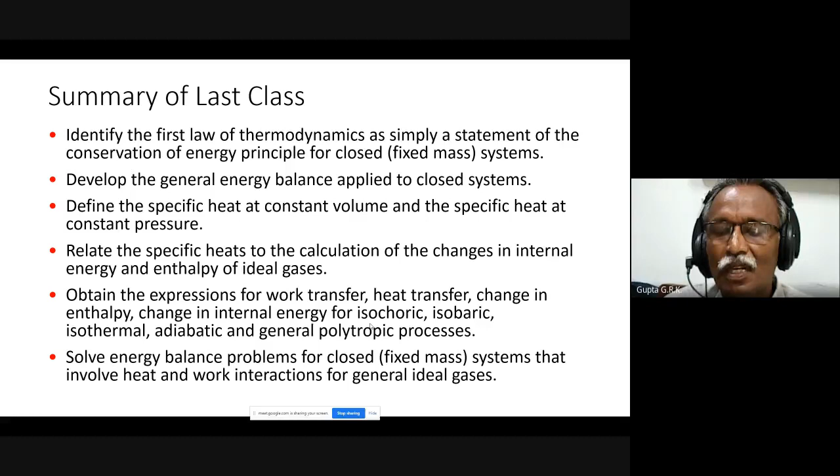And we solved energy balance problems for closed systems that involve heat and work interactions for general ideal gases. And if you see the formulae that we had, we have a summary of the formulae for all the closed systems for different processes. Mainly 1 or 2 things I want to stress on.

You remember that and it will make your life easier. So your first law of thermodynamics for a closed system is delta Q equals dU plus delta W. That simple thing if you take, if delta W is not there, then delta Q is equal to dU.

So whatever the sign of delta Q, dU also will have the same sign. If delta Q is positive, dU is positive. If delta Q is negative, dU is negative. Delta Q positive means I am giving heat to the system, so naturally internal energy increases, so dU is positive. So heat given to the system increases the internal energy of the system.

Similarly, delta Q negative means heat taken from the system, so naturally it loses internal energy and dU is negative and U decreases. So heat given to the system, internal energy increases. Heat taken from the system, internal energy decreases.

So it's straightforward. Suppose delta Q is not there, dU and delta W are there. So dU plus delta W equals 0, or delta W is equal to minus dU. So delta W and dU will have opposite signs. If work is positive, dU is negative. If work is negative, dU is positive.

We can understand that because work is positive means work is done by the system. How can it do that? By spending internal energy. So internal energy decreases. So if work is done by the system, internal energy decreases. If work is done on the system, delta W is negative, so dU becomes positive, meaning its internal energy increases, because I am doing work on the system, there is some input to it, so naturally its energy increases.

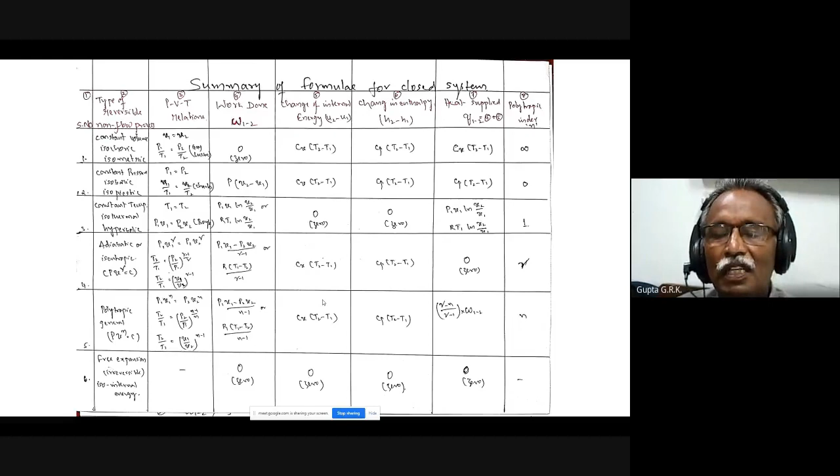Okay, some more things we will come across later. And also we have seen some more relations regarding efficiency.

Efficiency is desired output by required input. So output is the profit that I get, and input is my capital I spent for that.

And we defined combustion efficiency. So calorific value is the input, and whatever heat it delivers, that is the output.

And if you have a power plant with fuel as the input, and if I want the overall efficiency, the main input is the fuel, mass flow of fuel into calorific value, and the main output is electrical power.

But there are three energy conversions: chemical energy to thermal energy to mechanical energy to electric energy, through three different equipment. So I have to use the efficiency of all of them, and the product will give me the overall efficiency.

Similarly, for a pump, as I told, due to irreversibilities there will be losses. I am giving some work to the pump, and it increases the energy of the fluid. So input is the shaft work, output is the fluid energy.

Similarly, for a turbine, I get high energy fluid from which I get shaft power. So input is the energy of the fluid and output is the shaft power. So for pump-motor or turbine-generator, you have the combined efficiency: pump efficiency into motor efficiency, turbine efficiency into generator efficiency.

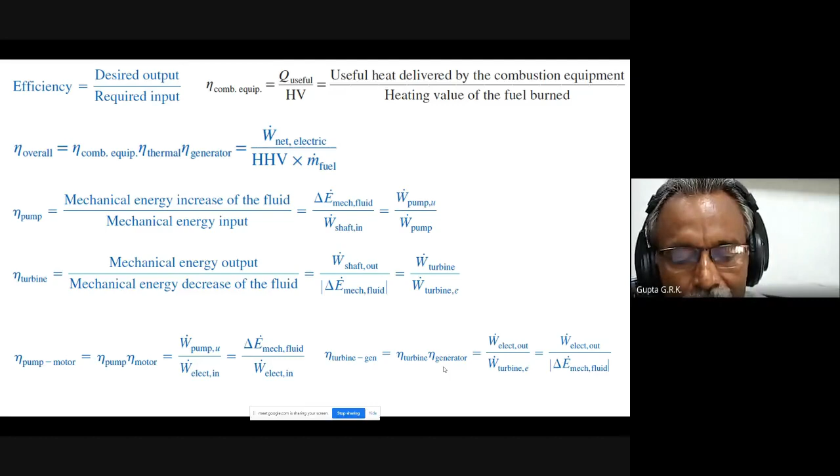Any doubts about this matter? Then otherwise we will go to today's topic. Mainly you have to feel comfortable in solving the problems. Once you are comfortable, you will have full confidence of handling the subject easily.

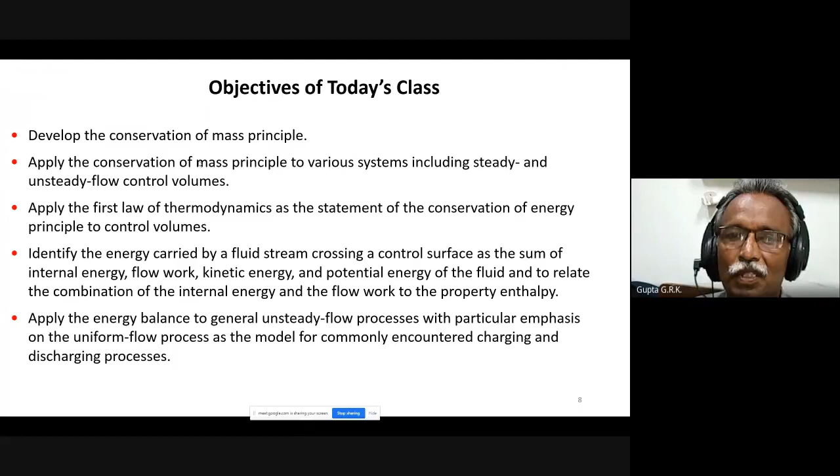And then we apply this energy balance or energy equation to various open systems or flow devices. So that is the objective of this particular class.

So here, first law application for open systems, control volumes, or flow processes are all the same. If I consider some arbitrary control volume, the boundary is called the control surface. This is the mass of the control volume, and there may be a number of inlets and a number of exits. So some masses are entering, some masses are leaving.

Okay, and so mass flow rate. What is the expression for mass flow rate?

Mass flow rate is equal to... another thing is, hereafter we use C for velocity. Why? Because normally V is for velocity, but V is volume in thermodynamics, so I will have confusion. In closed systems I don't have any problem, but when I come to open systems, I have both velocity and volume in the picture. So velocity is given the symbol C. So rho AC: rho is density in kgs per meter cube, A is area of cross section in meter square, normal to the velocity direction, and C is the velocity in meters per second.

So AC, this is meter square into meters per second, which is meter cube per second. AC is the rate of volume flow. This also I didn't write, but you have to know about this. In fluid mechanics you will come across this, right? They will write AV or AC. AV they will write, but here it's AC. So meter cube per second means so much volume entering per second. So this is volumetric flow. Into rho, kgs per meter cube into meter cube per second, will become kgs per second.

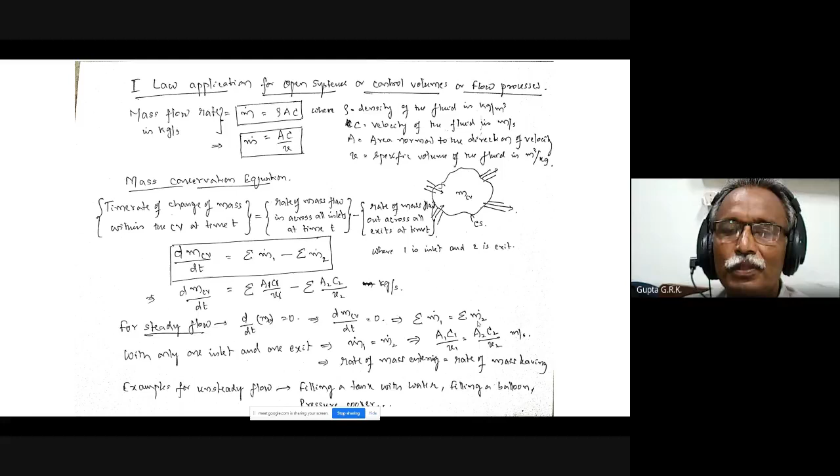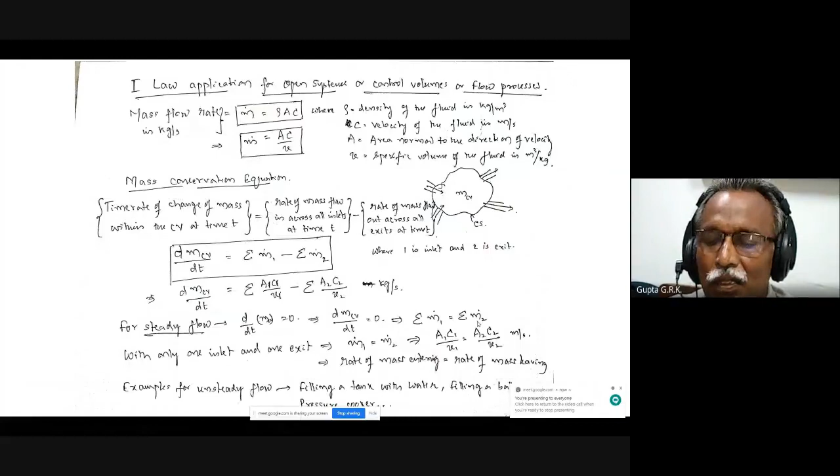So this is just straightforward, there is nothing much. Then, even in chemical reactions, mass is conserved. If I have 2 kg of hydrogen and 16 kg of oxygen combined, I will get water, which is the total mass, 18 kg of H2O.

Right? So conservation of mass principle for a 2 inlet and 1 outlet steady flow system. If 2 kgs are entering and 3 kgs are entering, leaving, so total inlet equals total exit, 5 kgs per second.

And conservation of mass principle for an ordinary bathtub. There is mass coming in, 50 kgs, and mass going out, 30 kgs. So there is an accumulation of water: delta m bathtub is equal to m in minus m out, that is 20 kgs. So this is conservation of mass, but this is unsteady flow. Here this is unsteady flow, there will be continuous increase of mass within the system.

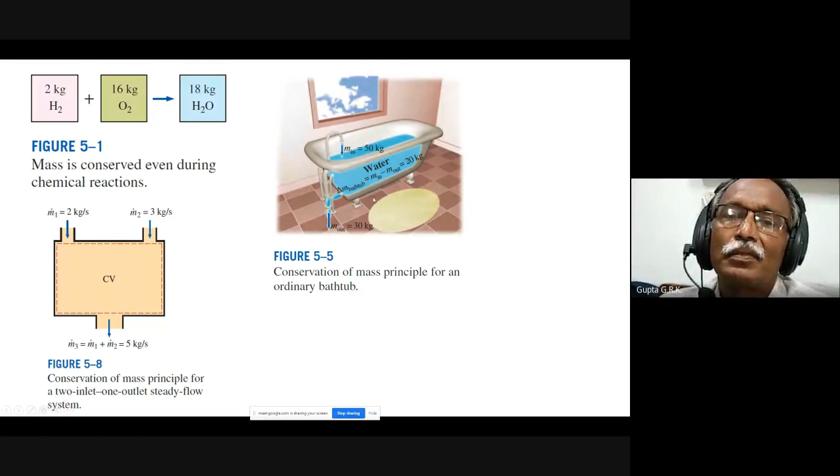And then another important thing is flow work and the energy of a flowing fluid. What is this flow work? Whenever some mass has to enter the system, it does not just open the door and come in. Suppose I open my door, and if my inside room is high pressure, how can something enter into it? If something is to enter, somebody has to push the air into the room, then only it can enter. So that is what is called flow work.

The work or energy required to push the mass into or out of the control volume. This work is necessary for maintaining a continuous flow through a control volume. If something is to enter, it is to be pushed in, and something is to go out, that is to be pushed out. So the work required for pushing the mass in or out is the flow work.

If the pressure is P and the area of cross section of the inlet is A, so PA is the force required to push it. Suppose this length it is moved by is L, so work equals force into L, and force equals pressure into area, so P into AL, that is equal to P into V, where V is the volume of flow entering the system. So the flow work is PV. This is important: flow work is PV. This is capital W, P into capital V, total volume. So per unit mass, flow work per unit mass, small w flow, is equal to P into small v, kilojoule per kg. This is the flow work.

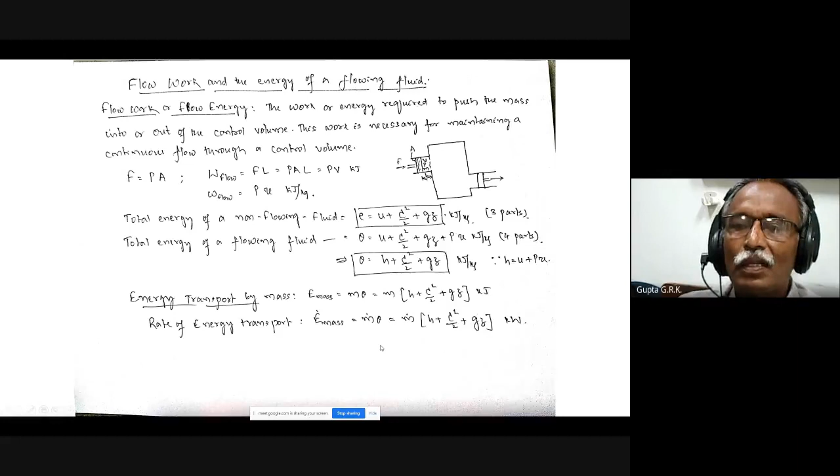Okay, that is the same figure. So the energy of non-flowing fluid is U, V square by 2, GZ. Energy of flowing fluid is this flow energy PV, U, V square by 2, GZ.

And these two together will become enthalpy. So it is before entering and after entering. So this mass goes into the control volume.

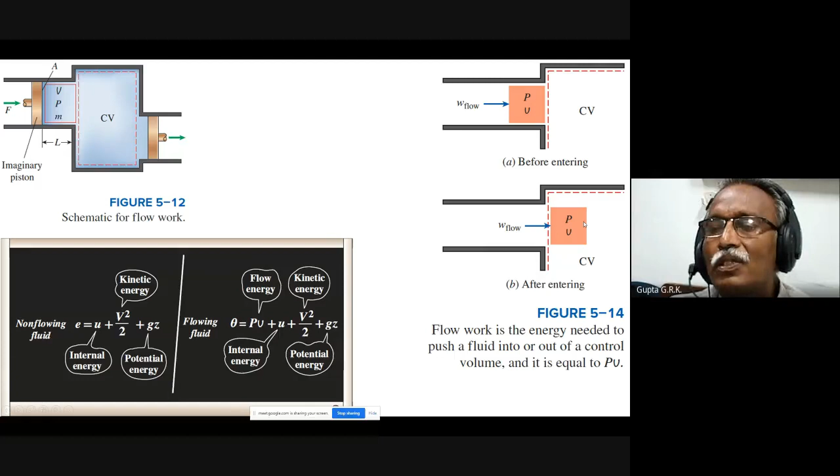Now we take the energy conservation. So rate of change of energy of the control volume. If the energy of the control volume is ECV, total energy of the control volume, then rate of change of control volume is dECV by dt.

So why does this energy change? Because of mass flow, because of heat transfer, and because of work transfer. Whichever crosses the boundary changes the property of the system naturally, that is the internal energy of the system or total energy of the system.

So dECV by dt is equal to rate of energy transfer in by heat, work, and mass, and rate of energy transfer out by heat, work, and mass. So the rate of heat transfer is equal to, suppose, delta QCV by dt. Here dot is not there, it is delta QCV by dt.

Because if heat is entering the system, the energy increases, so these two must have the same sign. If work is done by the system, then actually it decreases, total energy decreases, so I give minus here.

And some mass is entering with some energy, theta 1. So this energy entering the control volume is sigma m1 dot theta1 if there are more number of inlets. Similarly, sigma m2 dot theta2 if there are more number of outlets. Okay, this is the generalized energy equation for a flow system.

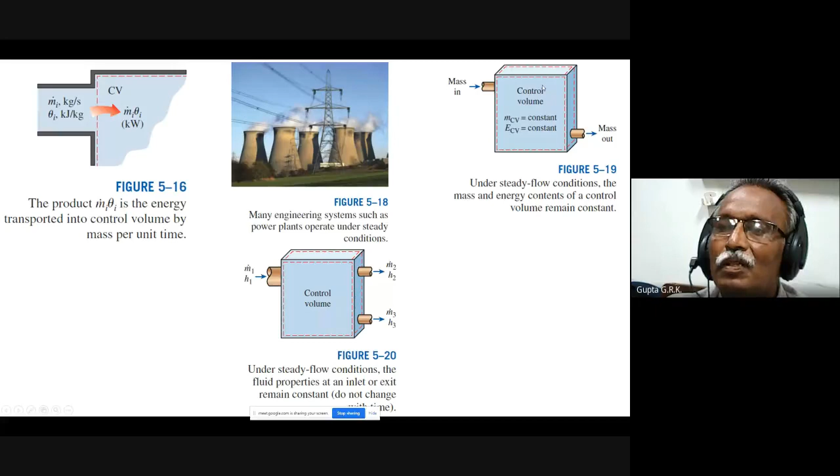Under steady flow conditions, the fluid properties at an inlet or exit remain constant, do not change with time. Under steady flow conditions, the mass and energy contents of a control volume remain constant. The mass here is constant, volume, the energy also remains constant, and then it is a steady flow.

So this we call it a steady state steady flow energy equation, SSSFEE. And assumptions already I have discussed: the composition, state, and velocity of the stream crossing the control volume boundaries do not change with time at entrance and exit. H1, C1, Z1, H2, C2, Z2 do not vary with time.

That is the first one. Then state of fluid at any point within the control volume is same at all times. So then dECV by dt equal to 0, dmCV by dt also will be equal to 0, that is, the mass of the fluid in the control volume is constant.

And because this is 0, m1 dot equal to m2 dot is equal to m dot for mass conservation. Whatever mass entering is equal to mass leaving. I need not have 1 and 2 for mass, it is m dot.

Rate of inlet mass flow is equal to rate of exit mass flow. And then the fourth assumption: the rate at which heat and work cross the boundary is constant. That is, delta QCV by dt is a constant, Q dot. And delta W by dt is W dot, which is constant.

Q dot is constant, W dot is constant. So I can modify this previous equation. This is 0, this is Q dot, this is W dot, and M1 dot and M2 dot both will be M dot, so I can combine this M dot into H2 minus H1... sorry, H1 minus... okay, that is right. So here M1 into H1 minus H2, M1 into C1 square minus C2 square by 2, M1 into GZ1 minus GZ2.

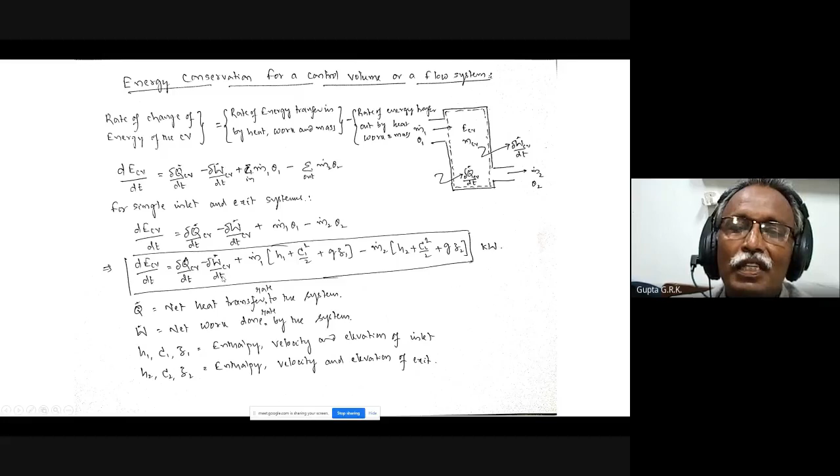And so if I write Q dot CV is equal to, all these things taken to this side, I will get the same form as the closed system. So Q dot CV is equal to M dot into H2 minus H1 plus C2 square minus C1 square by 2 plus G into Z2 minus Z1 plus W dot CV. It is just like a closed system: Q dot is equal to change in energy plus W dot.

This energy term includes enthalpy, kinetic energy, and potential energy. You have to remember this particular equation. Sometimes I will write it as dH, this is d of KE, this is d of PE - change in potential energy, change in kinetic energy, change in enthalpy. That's how I will write it sometimes.

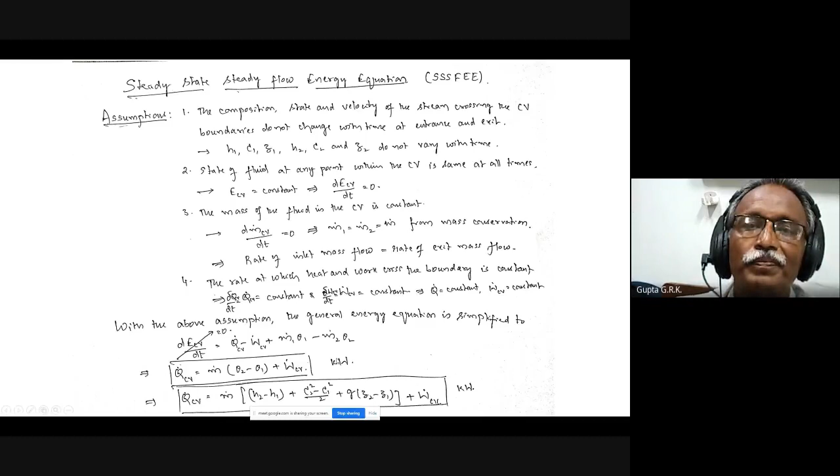So here again, these are the same things in different forms. Now, applications of steady state, steady flow energy equations - we essentially assume the same conditions for long periods of time, so steady state steady flow can be assumed for many devices. Such devices can be conveniently analyzed as steady flow devices like turbines, pumps, compressors, nozzles, diffusers, boilers, condensers, heat exchangers, etc.

So the equation is like this: Q dot CV is equal to M dot into theta 1 minus theta 2 plus W dot CV. And theta 1 minus theta 2, I will write like this - so now this is theta 2 minus theta 1: M dot into H2 minus H1, C2 square minus C1 square by 2, G into Z2 minus Z1, plus W dot CV. This is in watts.

And if I divide by mass flow, Q dot CV by M dot, it becomes Q CV in joule per kg. H2 minus H1 in joule per kg. So all these are joule per kg. QCV, WCV, H are in joules per kg, C in meters per second, and Z in meters.

But many times what happens is QCV, WCV, H in the problem will be given in kilojoules per kg. If I substitute them in kilojoule per kg, I have to divide here by 1000, because this is joule per kg and this is also joule per kg. So Q dot CV, now there is no dot, QCV is equal to H2 minus H1 plus C2 square minus C1 square by 2000 plus G into Z2 minus Z1 by 1000 plus W dot CV. This is in kilojoule per kg. So QCV, H, WCV are in kilojoule per kg, C in meters per second, and Z in meters.

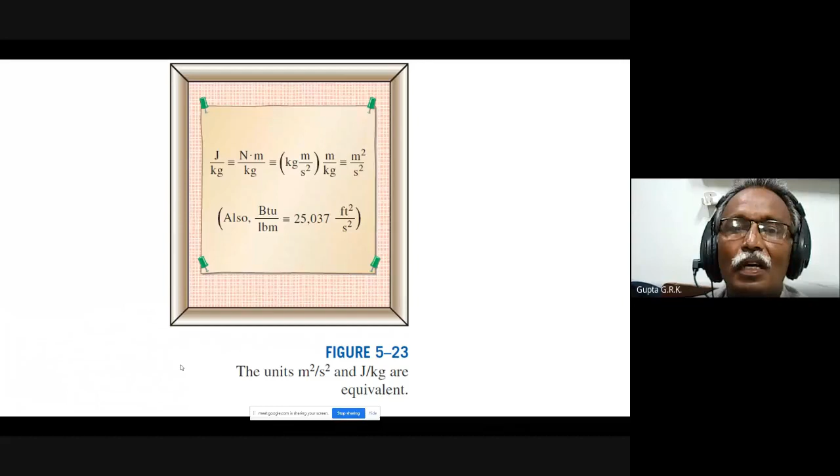So many times joule per kg - if you see in the previous slide, this is joule per kg, and actually this is also joule per kg. It should be dimensionally homogeneous, so C2 square should have the units of joule per kg. But we know that C is meters per second, so C2 square is meter square per second square. So meter square per second square units and joule per kg units also will be the same. Why? Because what is joule?

What is joule? It is like newton into meter. And what is newton? Kg into meters per second square. So kg meter per second square into meter by kg, if you take it, becomes meter square per second square. So joule per kg is equivalent to meter square per second square. We should not think how sir can write like this. These are in joule per kg, dt is meter square per second square, gz2 also meter square per second square. How can I write all these into a single equation? It should be dimensionally homogeneous. This is a dimensionally homogeneous equation because joule per kg is equivalent to meter square per second square. Is that clear?

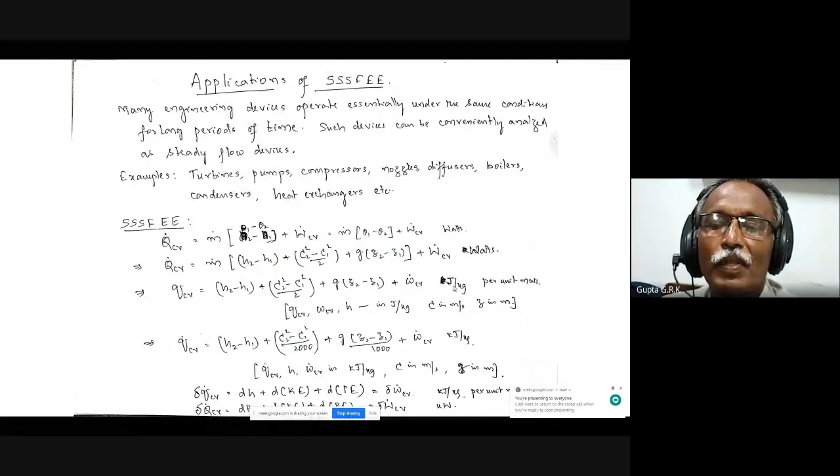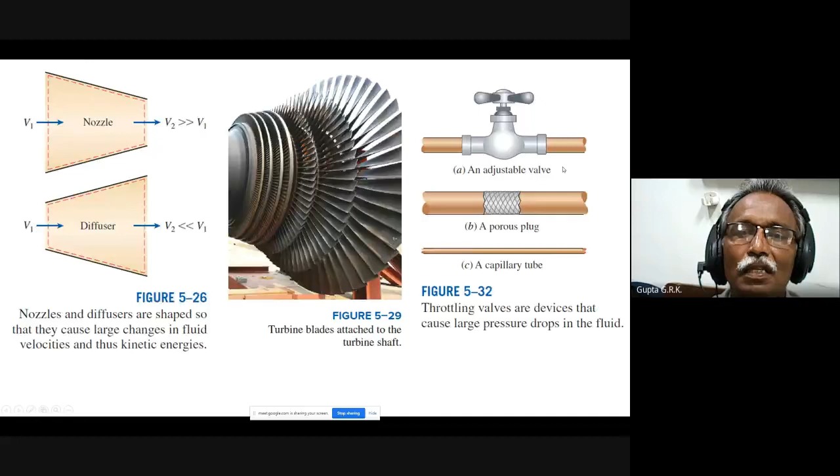There are some more examples like mixing chamber - some hot water coming, cold water coming, and I get warm water, there is mixing. And there is a heat exchanger - some cold fluid going, hot fluid coming, and there is heat transfer. All these things are steady flow devices. So we will see how we can use our SSSFEE for these devices.

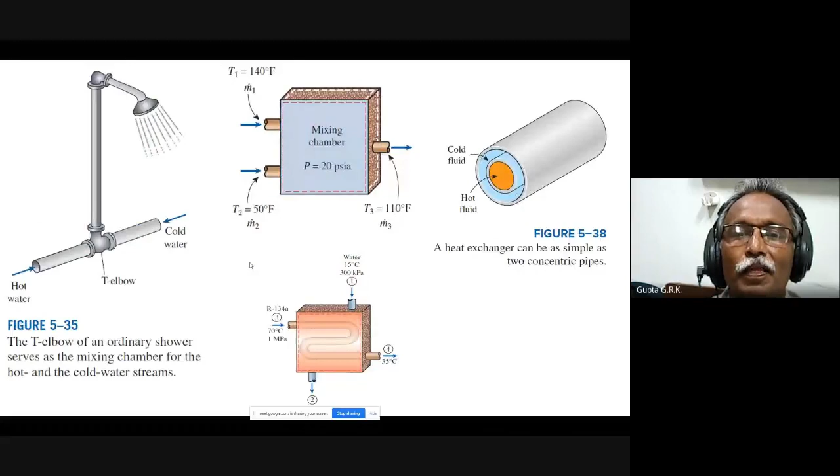Steady flow devices - if I take a nozzle, what is a nozzle? Nozzle is a device or duct that increases the velocity of the fluid at the expense of pressure. So pressure decreases and velocity increases across a nozzle. Here, usually there is no heat transfer and no work transfer, so Q dot CV equal to 0, W dot CV equal to 0. And Z1 equal to Z2, it enters and leaves at the same height, so d of PE is equal to 0. So what else is left? We are left with change in enthalpy and change in kinetic energy: dH plus d of KE equal to 0, because d of PE is 0, Q dot is 0, W dot is 0. So we get H2 minus H1 plus C2 square minus C1 square by 2 equal to 0, or H1 plus C1 square by 2 is equal to H2 plus C2 square by 2.

We know that velocity increases, meaning d of KE is positive. Velocity increase means kinetic energy is increasing. So if this is positive, this must be negative because the sum is 0. So dH is negative, meaning enthalpy decreases. That is velocity increase by expending enthalpy - H decreases across the flow. So KE increases at the expense of enthalpy. Enthalpy is converted to kinetic energy in the nozzle.

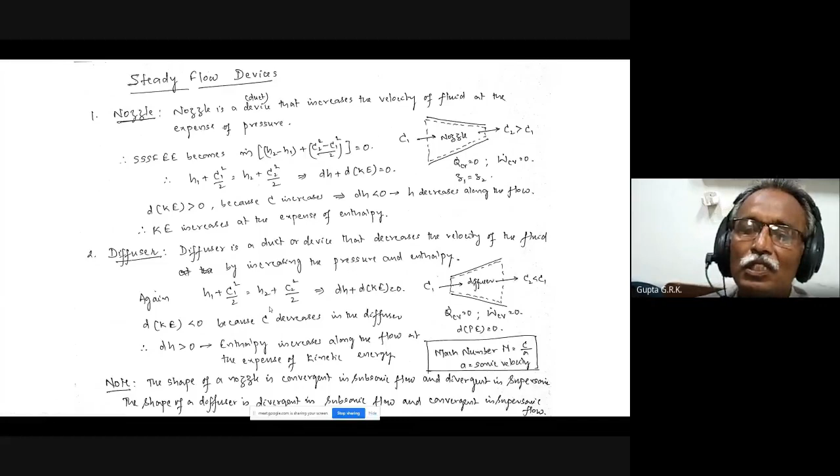Then coming to turbines and compressors. So what are turbines? Turbines are devices which drive electric generators in steam power plants, gas power plants, and hydroelectric power plants. So in steam power plants we have steam turbines. In gas power plants, gas turbines. In hydroelectric power plants, I have hydraulic turbines. So some turbine will be there which drives the generator, and the generator gives the electric power.

So as the fluid passes through the turbine, across the turbine, what happens? Work is done against the blades. High energy fluid is coming and hitting the blades, which pushes the blades, and the turbine rotates and the shaft rotates. As a result, the shaft rotates and the turbine produces work. So here W is positive.

And compressors are opposite. Compressors, blowers, pumps, fans are opposite to turbines. What is the difference? Here we give work, right? So electricity is supplied, electrical work is supplied, and it increases the energy of the fluid. So work is supplied to these devices from an external device, and it increases the pressure of the fluid or energy of the fluid. What is the difference between all these things? Pumps handle liquids only. All these are working with fluids, and fluids are liquids and gases. And if it increases the pressure of a liquid like water, we call it a pump.

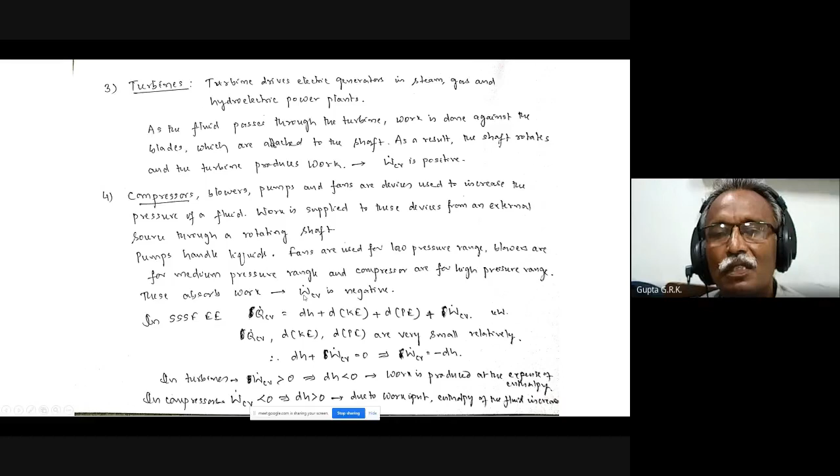In turbines, WCV is positive and dH is negative—work is produced at the expense of enthalpy. When steam comes from the boiler, it comes with high energy or enthalpy, and as it crosses the turbine, all that enthalpy is converted into shaft work. In compressors, work is negative—that is, I'm giving electrical work input, so the energy or enthalpy increases. dH is positive, and due to work input, the enthalpy of the fluid increases. This is how the steady state steady flow energy equation applies to turbines and compressors.

Coming to boilers and condensers, again both are similar concepts but opposite to each other—just as nozzles and diffusers are opposite, and turbines and compressors are opposite. In both boilers and condensers there is a phase change: liquid to vapor in the boiler, vapor to liquid in the condenser. This conversion takes place by heat transfer—you give heat to the boiler and take away heat from the condenser.

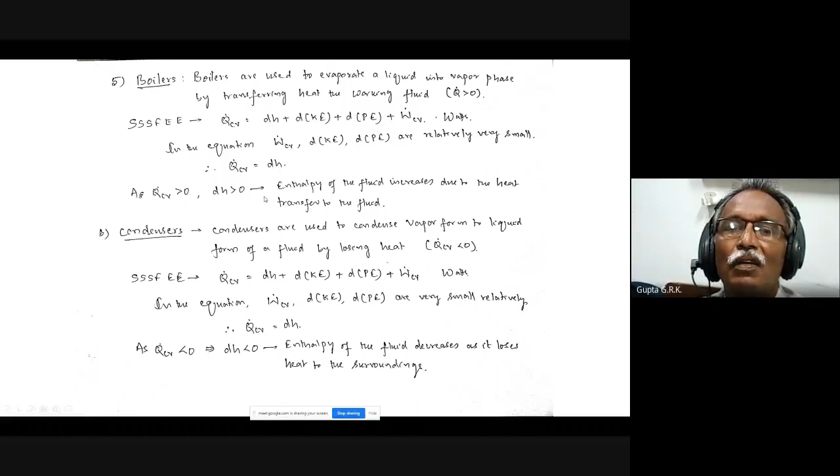Boilers are used to evaporate liquid to vapor phase by transferring heat to the working fluid, so Q is greater than 0. Taking the steady state steady flow energy equation, work is negligible since the boiler does no work, and d of KE and d of PE are also negligibly small. So the only contribution is Q dot CV equals dH. Condensers are used to condense vapor to liquid by losing heat, so Q is negative—but both equations are the same form. In the boiler, Q is positive and dH is positive, meaning when heat is given, the enthalpy of the fluid increases.

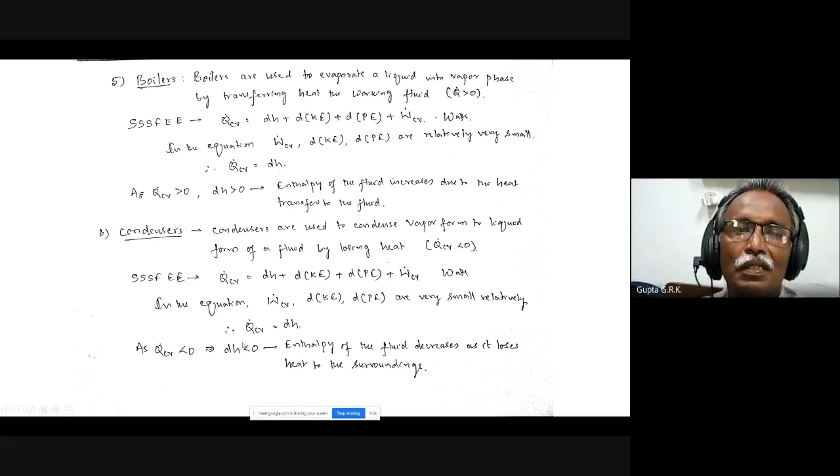Enthalpy of the fluid increases due to heat transfer to the fluid in a boiler. Here, enthalpy of the fluid decreases as it loses heat to the surroundings, in a condenser. So that is the application to boilers and condensers.

Coming to the throttling device. Like free expansion is a non-quasi-static process for a closed system, in the same way throttling process is a non-quasi-static process in open systems or control volumes. Throttling valves are a kind of flow restricting device that causes significant pressure drop in the fluid.

It is just like a valve on a pipe. If you have a valve and I close it, that is throttling. So opening or closing of that is throttling. If I open it, there is a flow taking place because from high pressure to low pressure, the flow takes place. This we will see later.

So Q dot CV equals dH plus d of KE plus d of PE plus W CV. Here there is no heat transfer, I am not heating or anything, so Q CV is 0. It is not doing any work, so W CV also is 0. There is not much change in kinetic energy because the cross section is same, velocity is same, no change in kinetic energy, and the fluid leaves at the same height, so change in potential energy is 0. So only thing left is dH.

dH also becomes 0 because all these are negligibly small or 0. dH is 0, means H is constant. That's why it is called an isenthalpic process. Free expansion is an iso-internal energy process, and this is isoenthalpy, meaning isenthalpic process. H is found to be constant in spite of change in pressure and volume of the fluid.

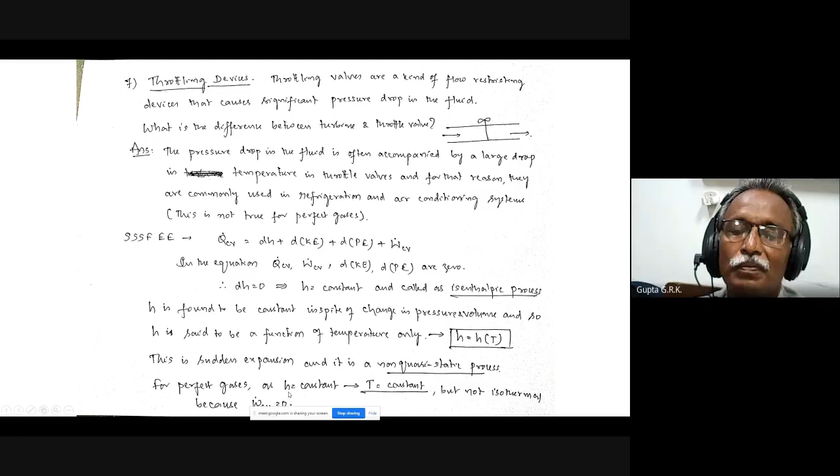And for this reason, they are commonly used in refrigeration and air conditioning systems. But this is not true for perfect gas. For perfect gas, T is constant, H is constant. But these are not isothermal because W is there in isothermal process, whereas here W is 0. So this is about the throttling process.

Then, mixing chambers of hot and cold water is shown. Suppose hot water is going this way, cold water is coming this way, and warm water is going this way.

m1 dot t1, m2 dot t2, and m3 dot t3. If you apply mass conservation and energy conservation, m1 dot plus m2 dot is equal to m3 dot, that is mass conservation.

For energy conservation, there is no heat transfer, no work transfer to the surroundings, so change in kinetic energy, change in potential energy, everything becomes zero. That is, dH is zero.

dH is zero means enthalpy entering is equal to enthalpy leaving. What is the enthalpy entering? M1 dot H1 plus M2 dot H2, these are the enthalpies entering. And enthalpy leaving is M3 dot H3. So this is the energy equation. If I know H1 and H2, I can find out what is H3.

The heat exchangers work in the same way. One fluid is going this way and another fluid is coming this way, and heat transfer takes place from hot fluid to cold fluid. Here also there is no heat transfer to the surroundings, WCV is 0, QCV is 0, d of KE is 0, d of PE is 0. So dH is 0, again enthalpy entering equal to enthalpy leaving.

One fluid is entering at 1 and leaving at 2. Another fluid is entering at 3 and leaving at 4. So total enthalpy entering, m1 dot h1 plus m3 dot h3, is equal to whatever is leaving, m2 dot h2 plus m4 dot h4. I can combine them as m1 dot into h1 minus h2 is equal to m3 dot into h4 minus h3. This is the heat lost by hot fluid, and this is heat gained by the cold fluid.

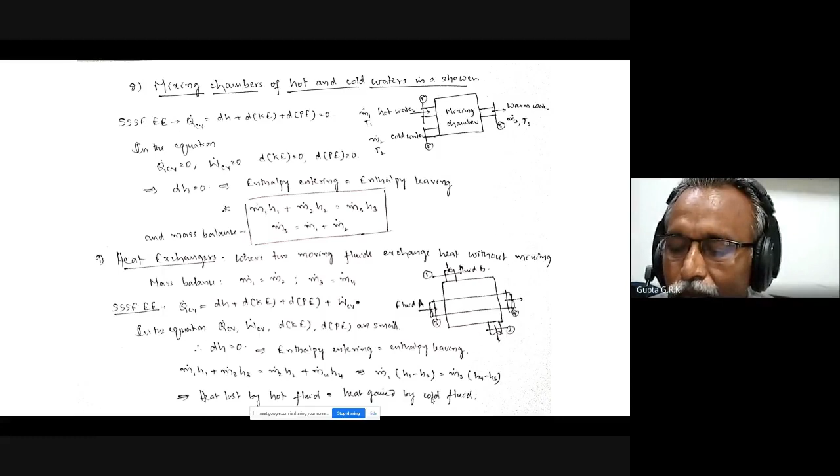Are there any questions?

Yeah, that is volume only. WCV equal to PV, pressure into volume. So then only the units will be homogeneous.

Okay, we'll go to the story then. So it's a nice story.

A gentleman was walking through an elephant camp, like a circus. He spotted that the elephants weren't kept in cages or held by chains, not kept in big rooms or cages, and not tied with chains either. All that was holding them back from escaping was a small piece of rope tied to one of their legs, through to a pole. As the man gazed upon the elephants, he was completely confused as to why they didn't just use their strength to break the rope and escape. They could just pull away and get away, but they weren't doing that, just lying there.

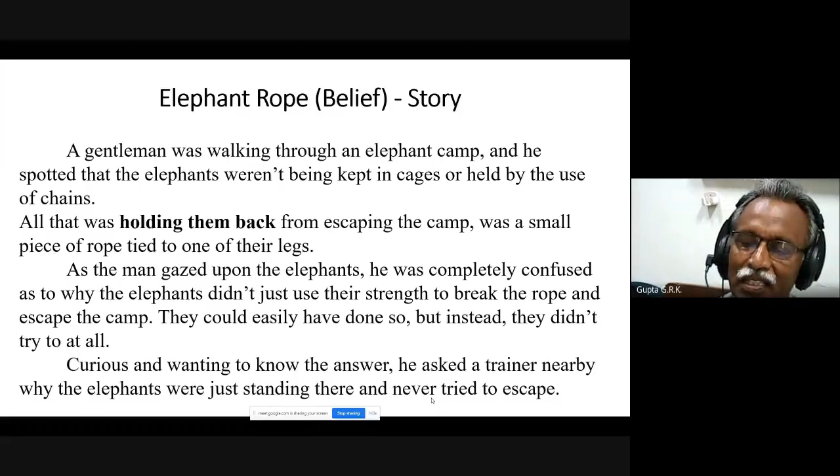The trainer replied: when they were very young and much smaller, we use the same size of rope to tie them, and at that age it's enough to hold them. As they grow up, they are conditioned to believe that they cannot break away. They believe the rope can still hold them, so they never try to break free. The only reason the elephants weren't breaking free and escaping was that over time they adopted the belief that it just wasn't possible.

There is a mental block created: I cannot break this rope, it is beyond my capacity. That mental block comes and they will never try. The same thing happens for many of us. No matter how much the world tries to hold you back, always continue with the belief that what you want to achieve is possible. Believing you can become successful is the most important step in actually achieving it.

Okay, thank you very much. This is important actually, how you believe about yourself, your capacity, your capabilities. Based on that, you achieve in your life. You decide what you want to become and you will become. Thank you, thank you very much. See you in the next class.